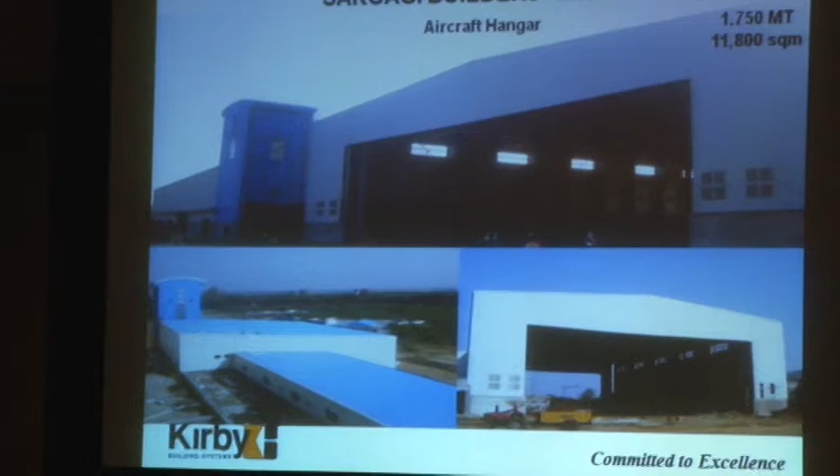Danfoss supplied electrical controls. These facilities are 71,000 square meters, close to 2,500 tons of steel.

Danieli is an Italian manufacturer. This structure, if you look at it from outside, has a very simple shape, but it is an extremely complex structure with almost 42 cranes running inside the building, turning from normal top running, underhung, to wall mounted. So it's a venture into an area where steel used to be done pretty much with conventional steel. That conventional steel blended with pre-engineered buildings brings a lot of synergy and benefits to the client.

Toshiba JSW, this structure is a blend of precast and steel. Precast columns carry steel girders which support 500 metric ton cranes, perhaps one of the largest capacity, and those cranes were tested for almost 750 metric tons.

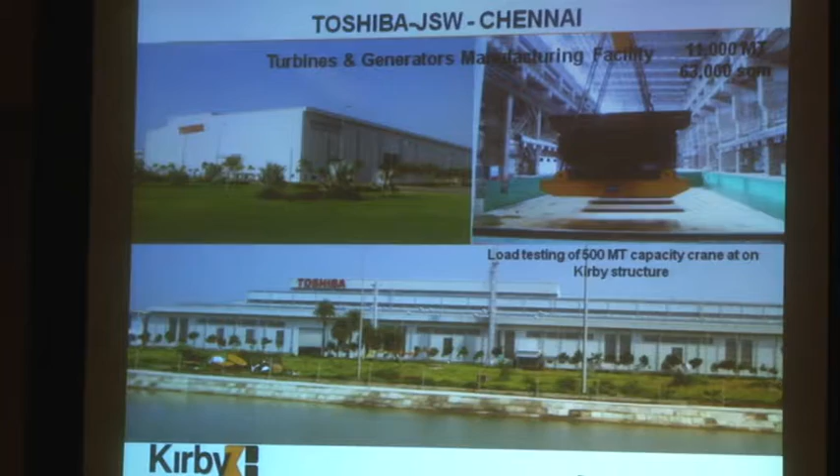I know pretty much all of you are interested in the commercial and building segment, but I thought there's a lot of merit in showing that India has moved from traditional sectors into much more complicated factory-made structures.

Mahindra Zaheerabad project, 50,000 square meters and 3,500 tons of steel supplied, was adjudged the best project in 2014 by Construction Week. We just received the award last week.

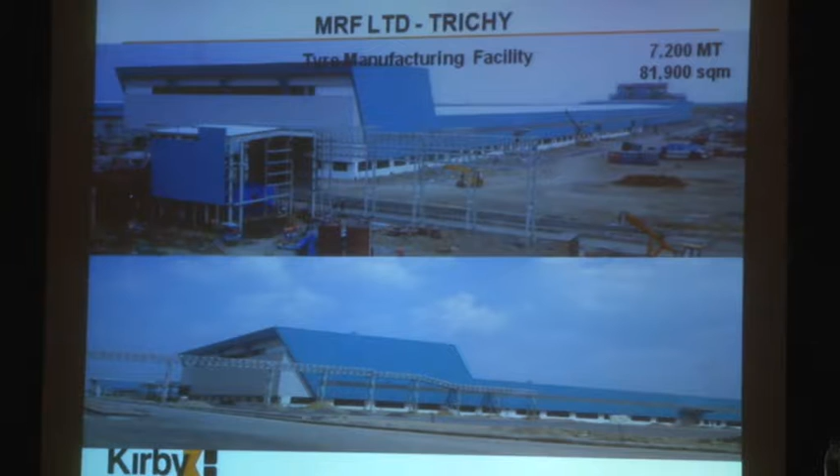MRF Trichy, the tire manufacturing facility, almost 7,200 tons of steel, all factory made.

Hindustan National Glass, we supplied 5 factories. This is the world's largest container glass manufacturing facility, an area of 20,000 square meters, and we supplied more than 6,000 tons of steel to this.

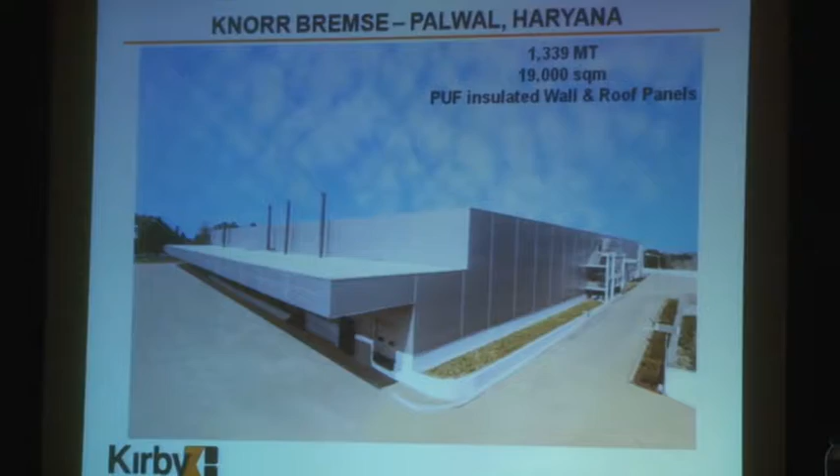This company manufactures brakes for automotives, a German company, almost 19,000 square meters of PUF panels. Nokia in Chennai, again 2,500 tons.

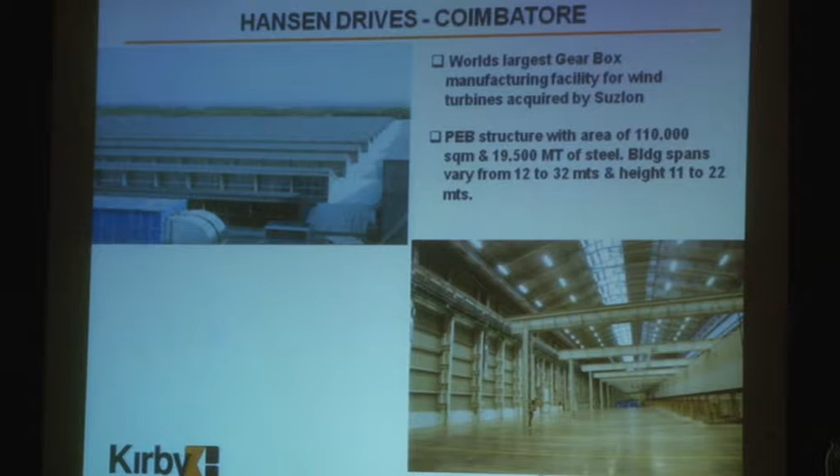So you can see that over the past 10 years, from 2000 to 2014, the reliability and confidence of architects and consultants toward factory-manufactured structures, which are lighter and much faster, has grown leaps and bounds.

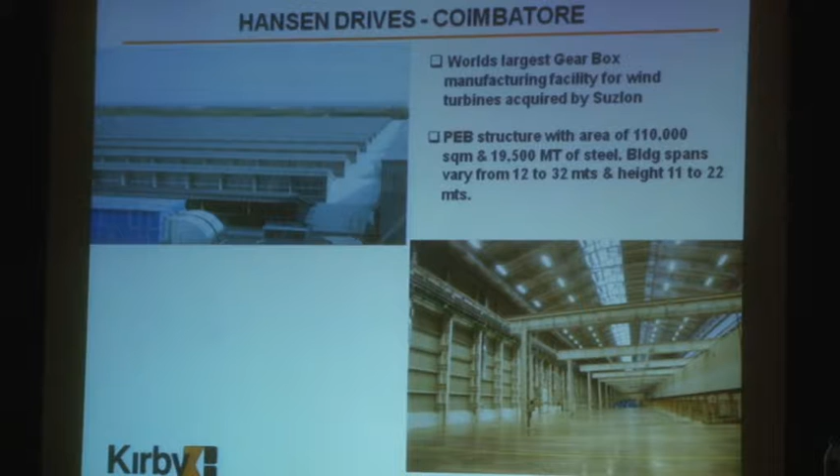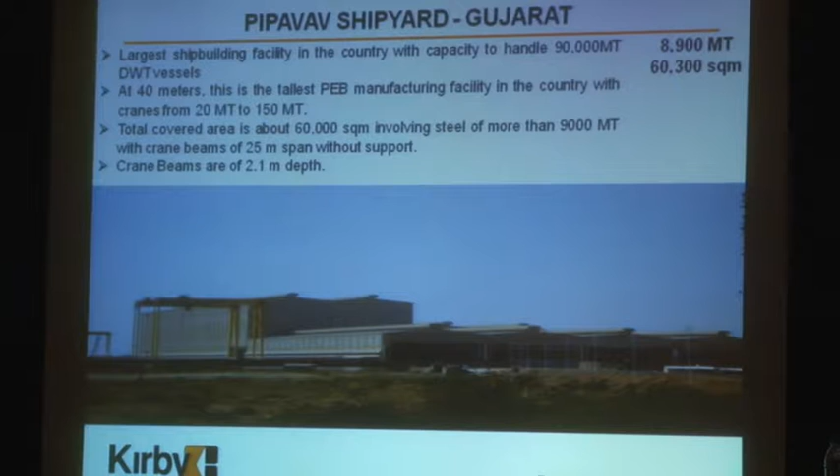It's an air-conditioned building. Pipavav shipyard, this structure is 40 meters high, carries a 150 metric ton crane, and almost 8,900 tons of steel. Now, talking about structural steel, broadly we divide this into 3 major segments.

One is the industrial segment, of which we talk about steel, oil and gas, chemical. These are all heavy segments.

When we started PEB in India, or factory-made steel structures in India, there was a lot of adverse reception to this area from our consultants. But I'll show you how things have moved, with even traditional on-site fabricators for very complex steel mills now going into factory-made structures.

In the infrastructure side too, steel has become a choice due to the flexibility it offers. And now we come to commercial buildings, which we're predominantly discussing today, where we see a huge opportunity.

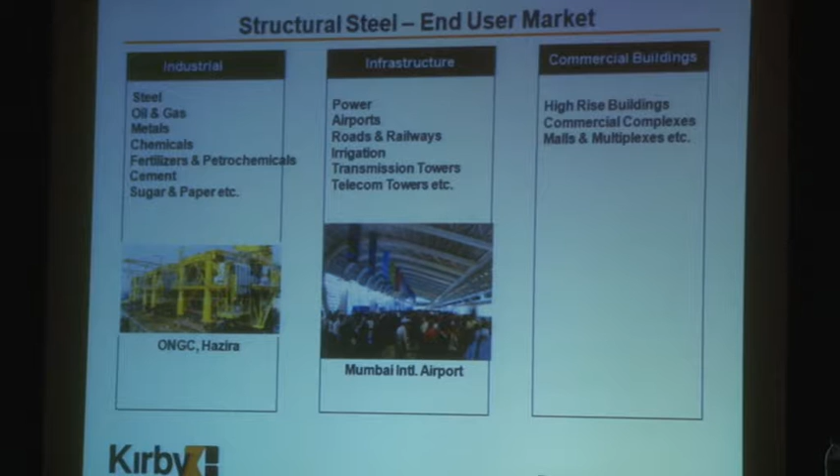In the structural steel section, demand is currently governed by the industry and infrastructure segments, that's where the entire demand is booming. The other segment moves at a much lighter pace.

Even a study by Frost and Sullivan shows that from 2009 to 2013, demand for structural steel grew by around 5%. But that transition is expected to go at a compound rate of probably double over the next 10 years, as the study indicates.

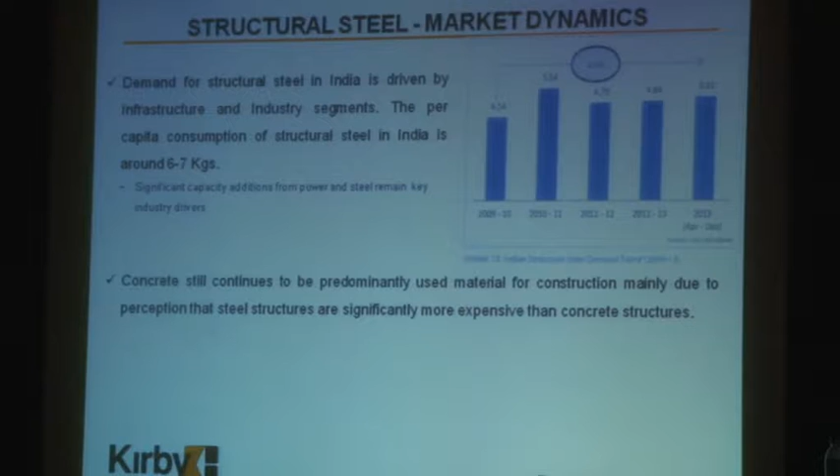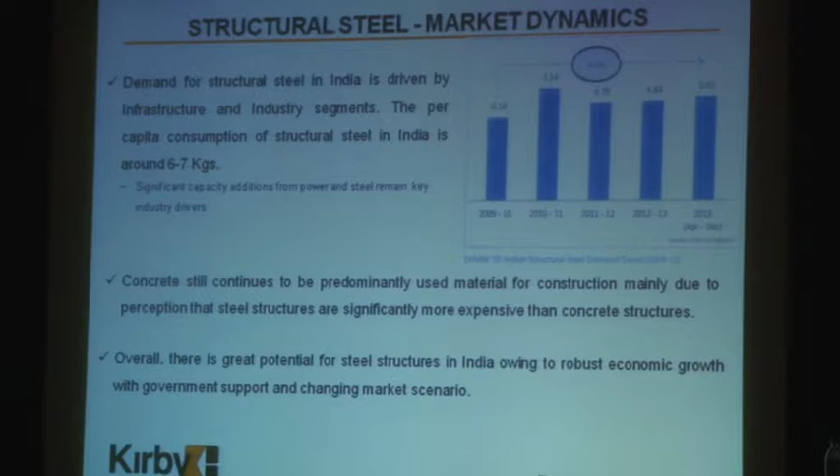We do agree that concrete remains the predominantly accepted material for obvious reasons mentioned today, but we do see a trend where steel is picking up slowly. So overall, there is quite good potential for steel in India, owing to robust economic growth projections and the positive sentiments we currently have.

If you look at Mexico, it's medium cement and medium steel, just at the brink. Similar to India, the per capita steel consumption is 6 to 7 kgs, but with the growth rate we will soon be in that area with medium cement and medium steel. That transition is going to happen in India sooner or later.

From the talks and discussions we're having today, we'd probably agree that 5 years before, we would not have had a discussion like this with this intensity. A lot of steel structures are being done - we saw today from Mukesh about the ICICI building and other complications. But the amount of interest and curiosity you see here is much, much more than what you were seeing a couple of years before. So it is definitely a moment in India.

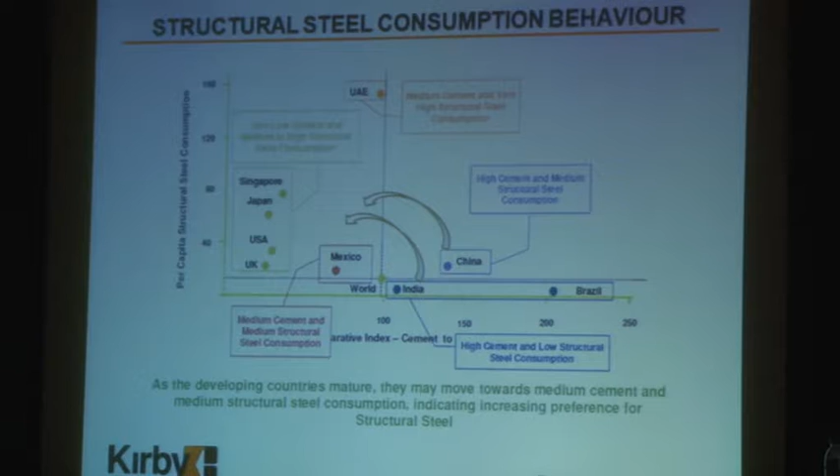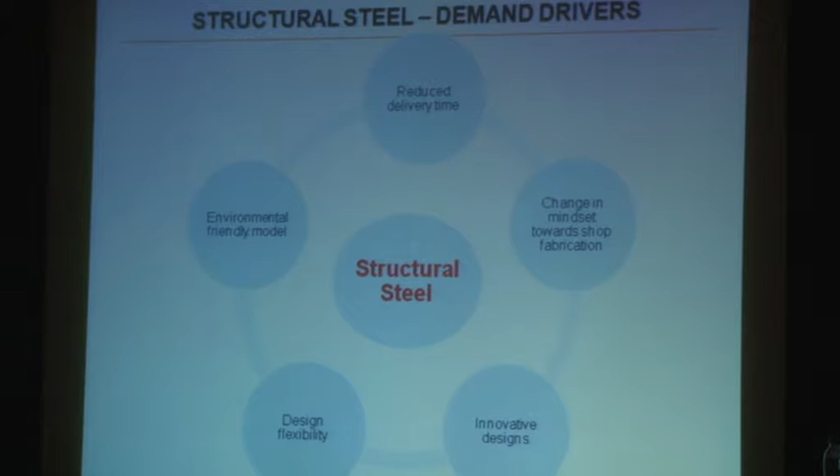What could be the drivers we see in structural steel? Reduced time for delivery brings a lot of cost advantage for projects of huge nature where finances are involved. If you're able to crash the time by something like 60%, 40%, the realizations are much higher. There's also a change in mindset - predominantly structures fabricated in the yard, in the plant, reduce the hazards involved in organizing, with a single point of contact doing the entire job for you. That's another driver pushing this very fast.

Innovative designs - we're talking about a combination of steel and concrete, trying to come up with an optimum cost. Design flexibility definitely allows changes even while the project is undergoing. So steel is the thing. And above all, with all the concerns about the environment, it's a fully green item - everything is green and you can build in a lot of green features to your structure with steel. These are the primary drivers making the industry move.

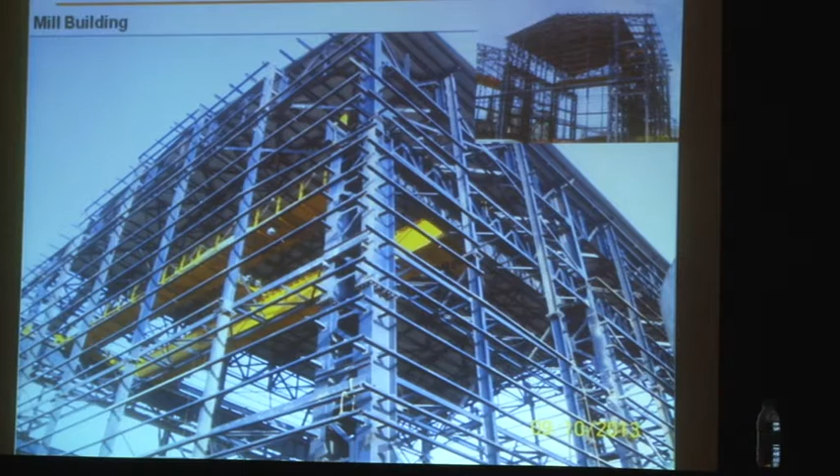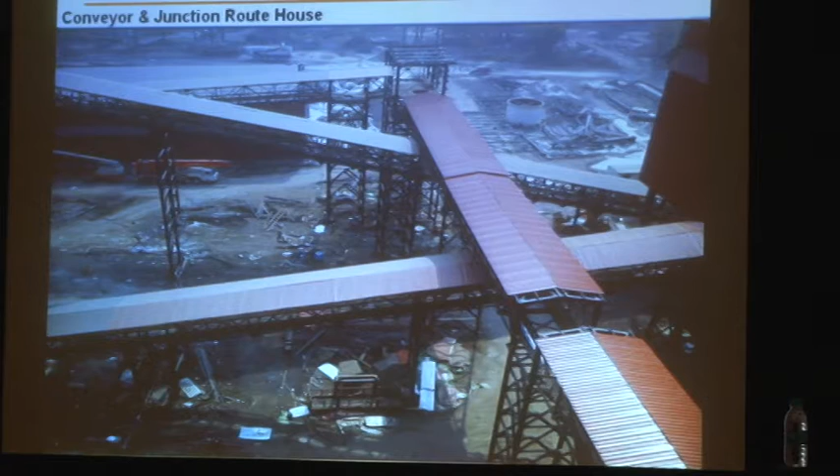One structure we wanted to briefly talk about is this structural steel facility. This particular facility for JSW structures used to be predominantly all site fabricated. Recently they've gone 100% into factory fabricated structures, so the shift is very evident. There were a lot of pipe racks, conveyor things - it was all moving from the site mode of fabrication to factory made, ready-made, assembled nuts and bolts, crashing the timelines by something like 50% in these sort of structures.

Another major segment we touched upon in infrastructure is power plants. Power plants used to be, to a great extent, site fabricated - now we've ventured into that. What makes it very complicated is these floors carry loads like 150 kg per square meter, 150 kilonewton per square meter - very heavy loads getting into sections built up very thick, 60, 70, 80 millimeter thick. So we are all now moving into the stage where we identify and understand these advantages.

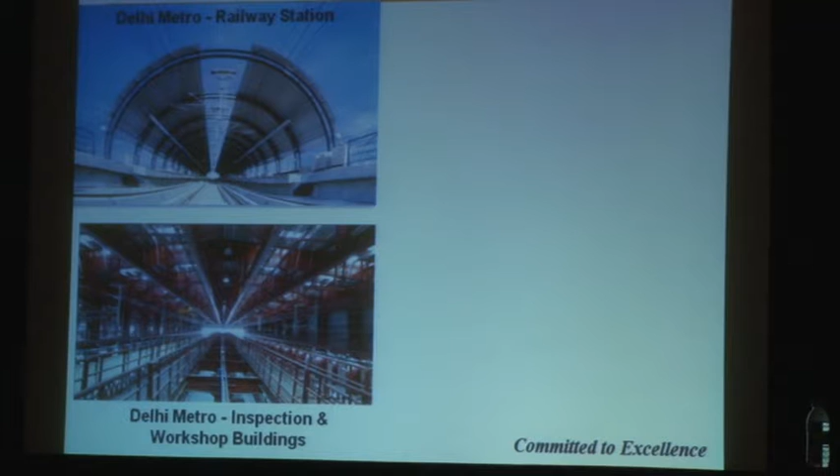Contractors like us are doing metros and infrastructure, all pretty much factory fabricated. We did structures for Delhi Metro, we're doing for Hyderabad Metro, and we'll be doing for a couple of other metros too. The Delhi Metro station, pretty architectural, used to be conventional - see this.

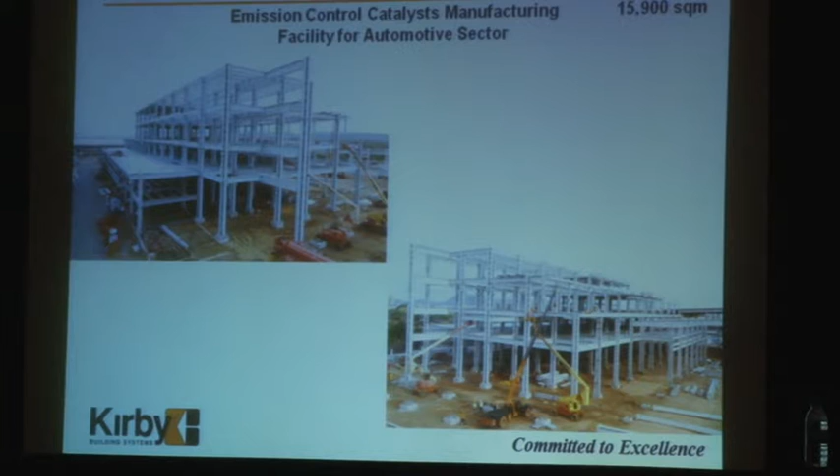The interest we've evidently seen over the past years is a lot of movement from single-story structures to multi-story structures. In industrial structures, this is a manufacturing facility for BASF, one of the largest chemical producers in India. This structure is consuming almost 3,500 tons of steel and coming up - we can see multi-level structures coming up in steel using a mix of hot rolled and built-up sections. There's another one for Idemitsu Lube coming up in Patalganga in Pune.

And for commercial structures, the topic we're all eagerly looking forward to is this segment of medium to high-rise structures, commercial complexes and multiplexes.

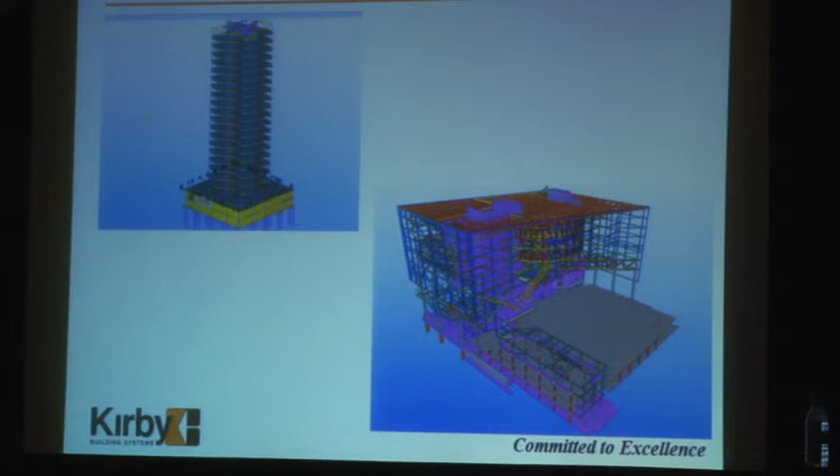This definitely requires very sophisticated software which can communicate with each other, like Xsteel, ETABS, and Tekla. These sort of things add a lot of value to the entire value proposition, where we do the entire design, fabrication, supply and erection. Of course there are limitations and discussions we work through together, but these softwares combined with our capability and experience bring a lot of advantage to the project.

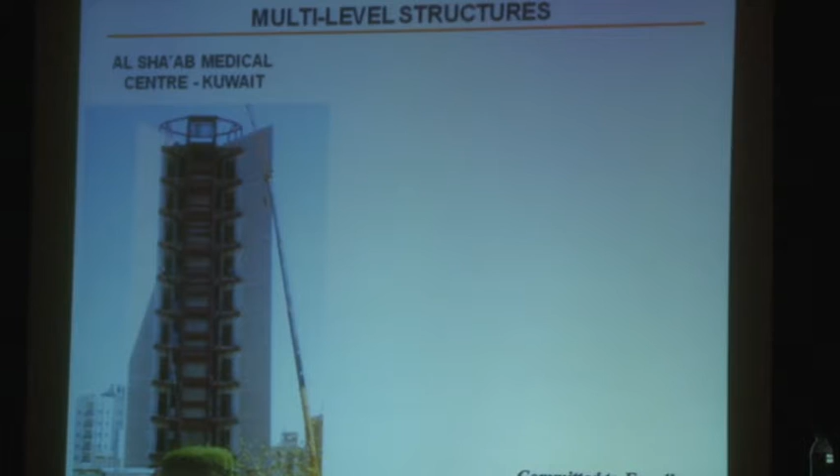This is a structure we did for a medical center in Kuwait, a G+10 structure. In this segment, one thing we normally see is the moment conventional steel comes up, precast also augments it well. So steel along with precast goes on a very fast mode of construction, which saves considerably on time.

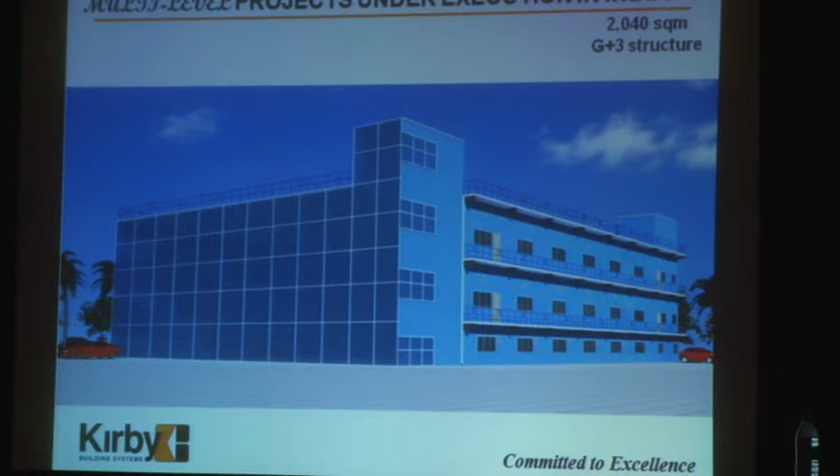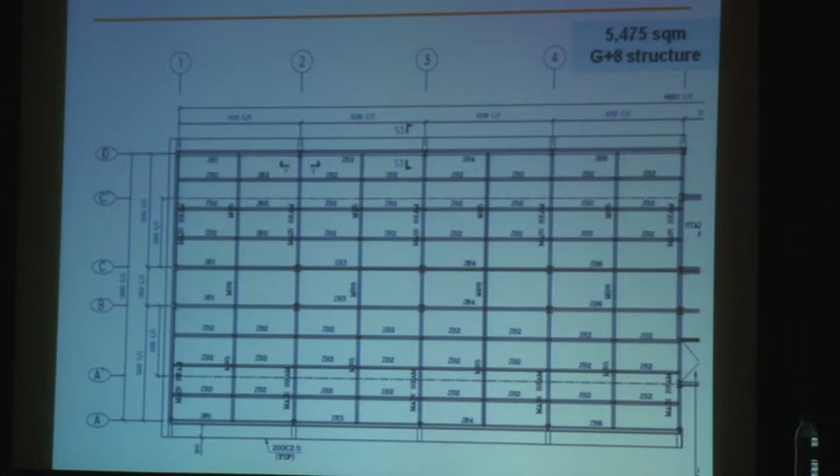Currently in India we're doing this project with G+3, and there's another G+8 structure in the western region under execution. This is around 5,500 square meters, a very fast track project, with delivery around 4 months from drawing approval, including erection of the structure in place. Where there are constraints of place and time, conventional steel becomes the master's choice. You can see this good accommodation with rooms on both sides and a corridor in the center, which can be expanded to much more complex structures.

That's what we've seen now.

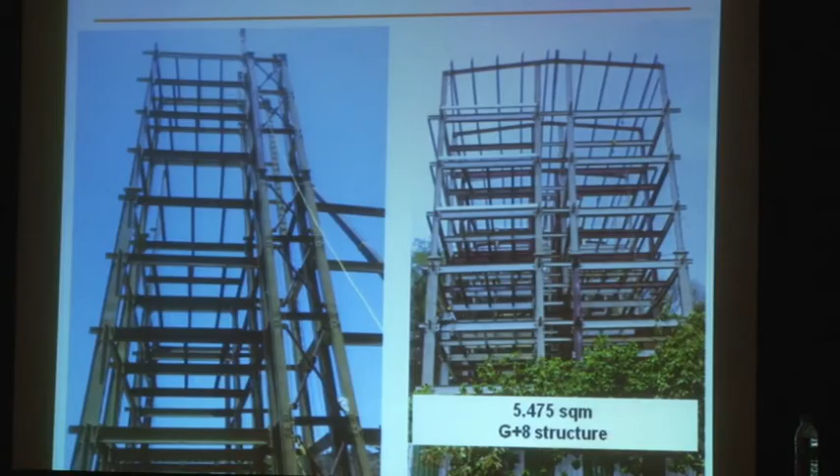Some pictures of that building. This building used steel structures with bison panels as the walls for partitions, as you can see.

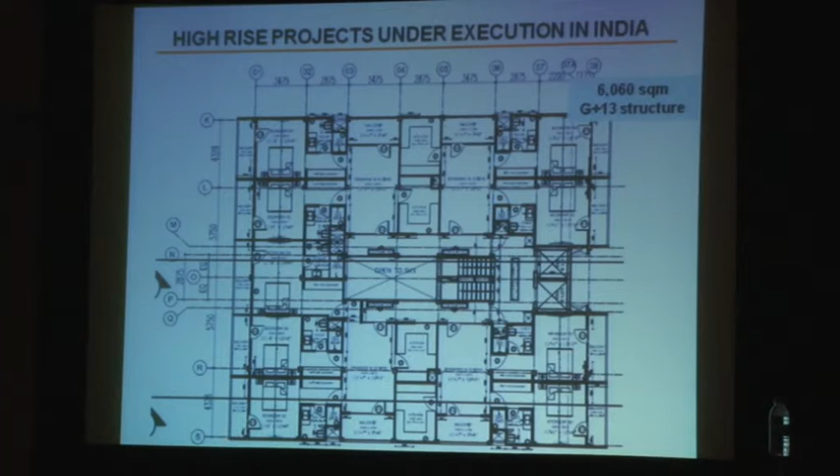Another structure we're currently executing is a G+13 structure in the upper north, in a pretty seismic sensitive area - quite a challenge in design. This is going to be a residential unit, a total of around 6,000 square meters, with entire completion for us at 6 months. That's the project under execution.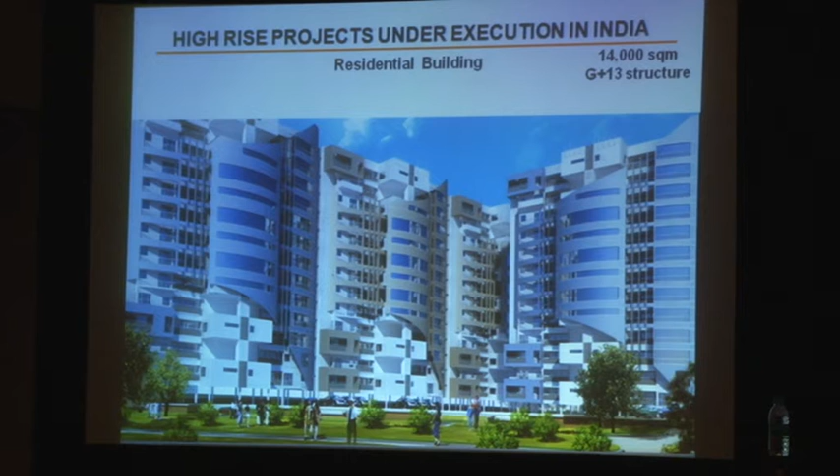If you look at the opportunities in a developed country, the building segment would be the main driver for structural steel - almost 60-70% of the entire consumption is structural steel versus concrete. But if you look at a case like ours, we are on the other side, just the reverse. That's where the opportunity is, tremendously.

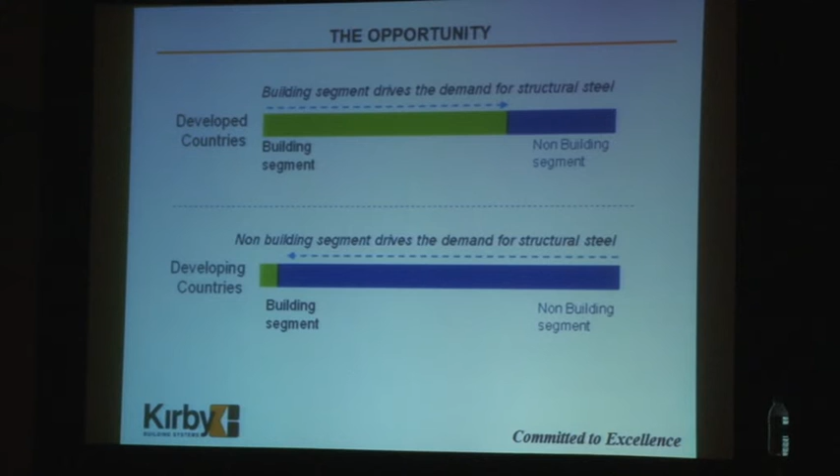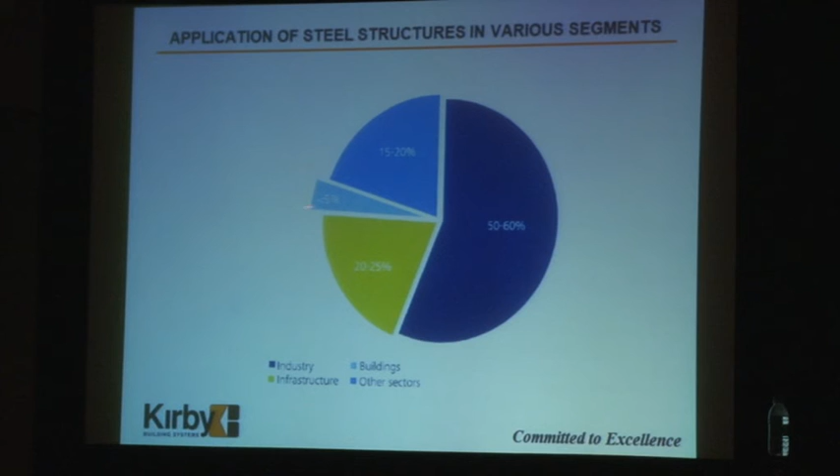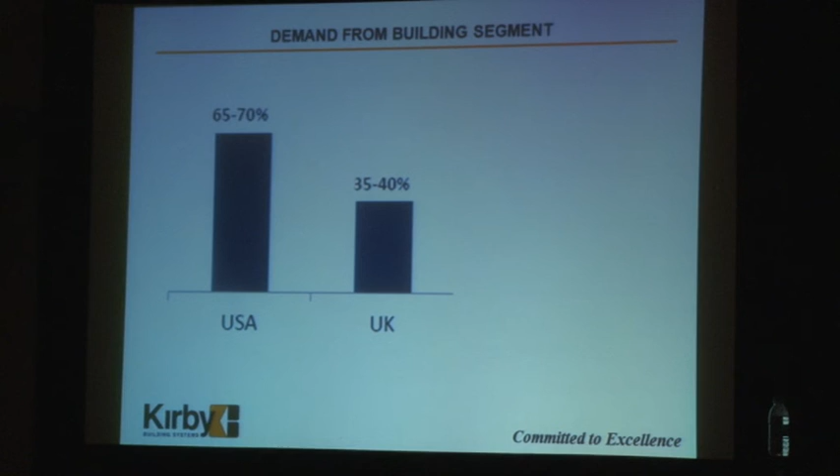Now as per that chart, the industry segment is 50 to 60%, infrastructure is around 20-25%, and the building segment is 5%. That's where the consumption of structural steel is in India currently. If you look at UK, around 40% will be the percentage of steel, and USA is 65-70%, where we are at 5%, gentlemen.

So what I would like to close by saying - I'm very happy to note the interest in this segment, and we as the enabler are equally geared to support your ventures to the requirement where we could partner to make this realization. So I rest my presentation, sir.

Thank you, gentlemen. Thank you.